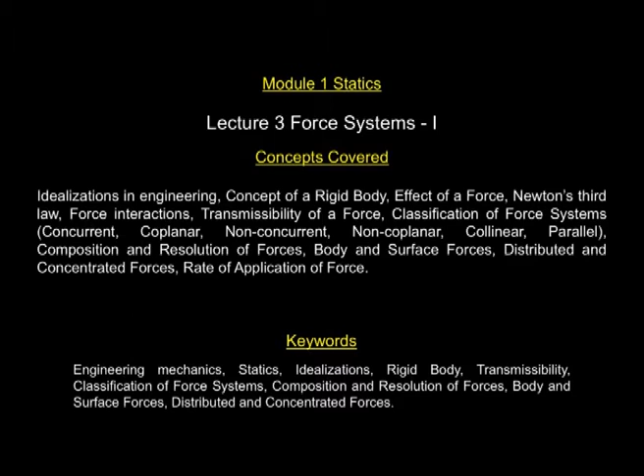So, let us get on to the main body of the course, and let me start with the first chapter on force systems.

Idealization is a crucial step in engineering approach for the purpose of analysis. Why do we do that? This is because actual behavior of systems are generally complex. Consideration of all features is difficult or impossible in many cases. So this is very important. You have to look at what is the phenomena that you want to analyze. Depending on the context, you have to make an appropriate approximation.

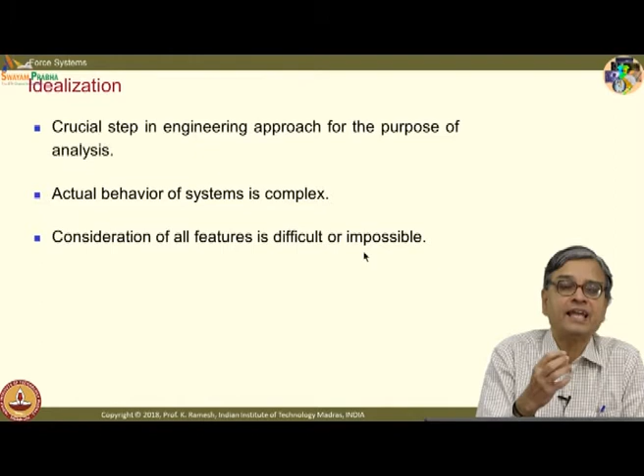So, when I have a physical system, I extract the essence of it by a mathematical model. And what is a mathematical model? We choose a mathematical model such that it is simple to analyze, yet exhibits the phenomena under consideration. So, the challenge lies in how to arrive at a mathematical model for a given physical system.

And how are you sure that whatever mathematical model I have taken is good enough for the given application? The only way is you verify it based on experimentation. So experimentation is the ultimate key to verify a given mathematical model.

So you have to look at, all physical systems are generally nonlinear. We try to model it as linear for the purpose of analysis. Otherwise, the problem becomes too complex to analyze.

See, if you can look at cosmology, they assume that mass is uniformly distributed, whereas there is a large distance between earth and the moon, and earth and the sun, where nothing is available, yet you make an idealization that mass is uniformly distributed. This may be good to start with when you want to analyze certain aspects of cosmology.

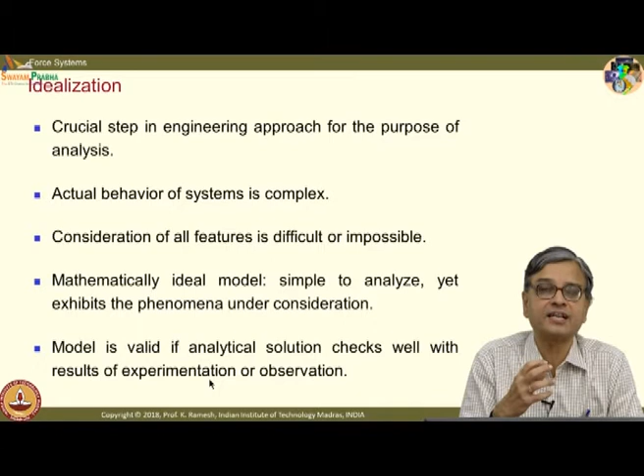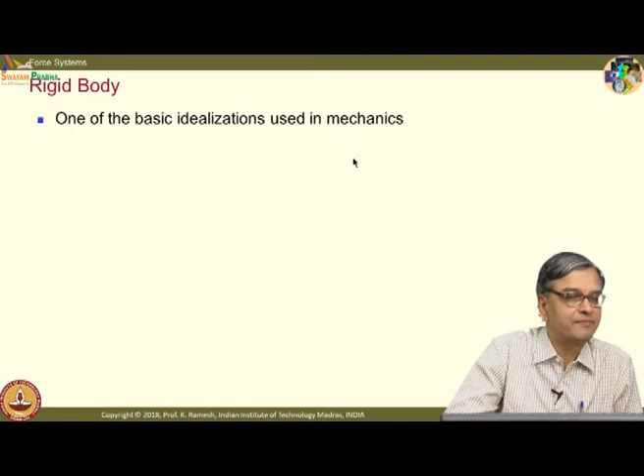And one of the basic idealizations used in mechanics is to consider the body as rigid, and we have already seen in the previous class the actual definition of a rigid body. The definition says a rigid body is one in which all particles remain at fixed distances from each other irrespective of the forces that act on the body. In essence, it does not deform under the action of forces.

Is it true? Not strictly true in many instances, but it is a very powerful idealization to get started. And fortunately, in this course, you will only come across rigid bodies. This idealization is used both in the study of statics as well as dynamics. And you cannot use this idealization indiscriminately, you have to be very careful, fine.

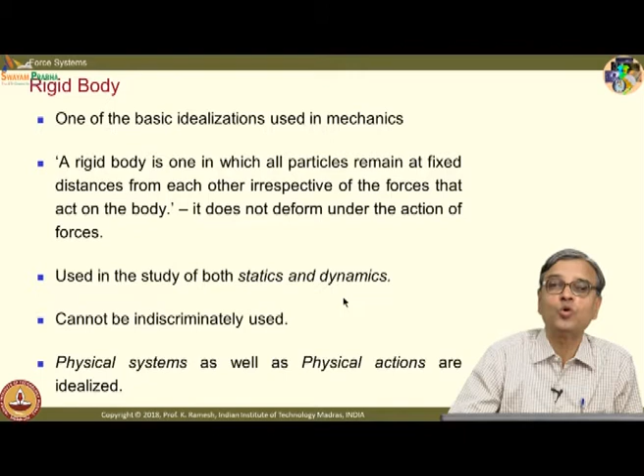And what you will have to notice is, we idealize physical systems as well as physical actions. When you say a body is rigid, you are idealizing the physical system. And we will also represent a force by a simple vector indicating it is a concentrated force. Concentrated force is again an abstraction. It goes with rigid body idealization. You can't think of a concentrated force without assuming the body as rigid, because in reality all bodies deform.

You will only have a distributed force whenever there is a force interaction. If you want to accommodate that in your analysis, you will take years to solve a problem, or for some instances you may not even have a first level solution.

And what is the concept of a force? You find a person is pulling something in the field, and another one, a footballer, is hitting the ball. So you have some kind of an interaction that takes place between the footballer's foot and the ball. Now we would like to do the analysis. How do I get started with the analysis? It is a very simple way of describing complex physical interactions between bodies. What happens physically, we model it as a force.

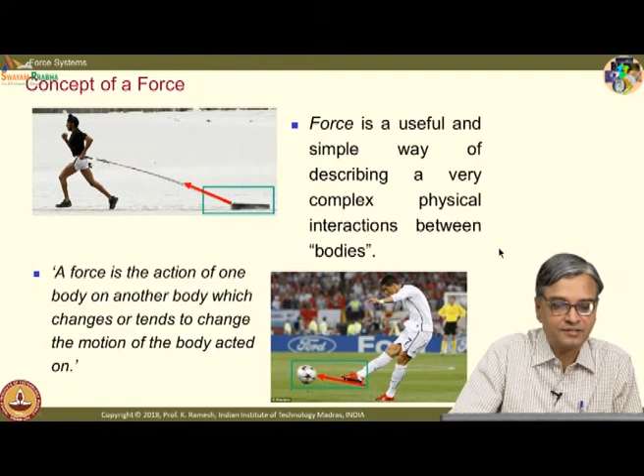And what is force characterized by? Force is characterized by point of application. I have a generic body here, and I could have multiple points where there could be force. And when I say a force, it is characterized by its magnitude as well as a direction.

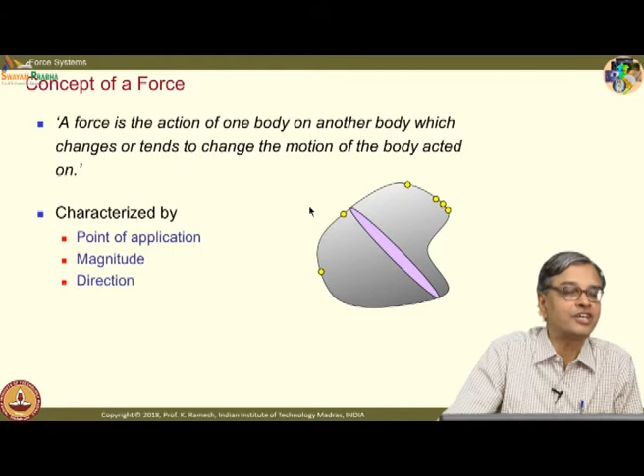So when you have a quantity which has a magnitude and direction, how will you label that? You can label that as a vector, provided it also satisfies the commutative law. If it does not satisfy the commutative law, it cannot become a vector. We will see later, finite rotation does not come under the purview of a vectorial quantity, whereas infinitesimal rotation can be shown as a vector quantity.

So I could represent the force by a line like this, showing the magnitude as well as the direction. It could be concentrated or a distributed force like this. I have already told you, in reality, whenever there is interaction of one body with the other, it will always be distributed. But in many instances, to make our life simple, we indicate this by the resultant and show that as a concentrated force. Concentrated force is also an abstraction, goes hand in hand with rigid body idealization.

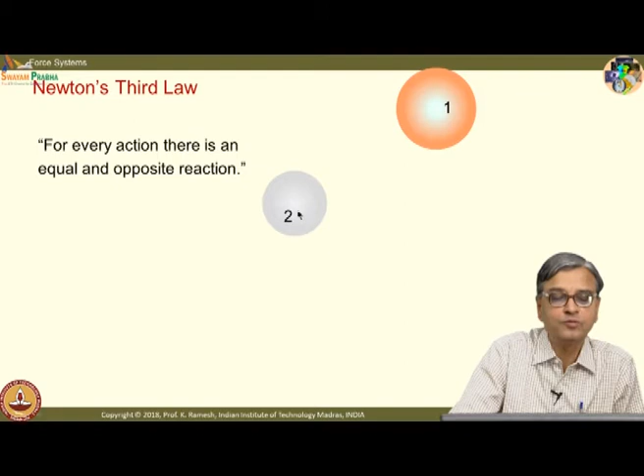From Newton's third law of motion, force always exists in pairs. I cannot have just one force indicated like this, for which I have to look at Newton's third law: for every action, there is an equal and opposite reaction. I have shown two bodies, 1 and 2. So body 1 will exert a force on 2, body 2 will exert a force on 1, and I could show them as vectors like this, F12 and F21. So when I say force, it indicates this pair, and they are equal and opposite, very obvious. Okay.

And you should also remember and understand it very clearly: action and reaction forces always act on different objects. They do not act on the same object.

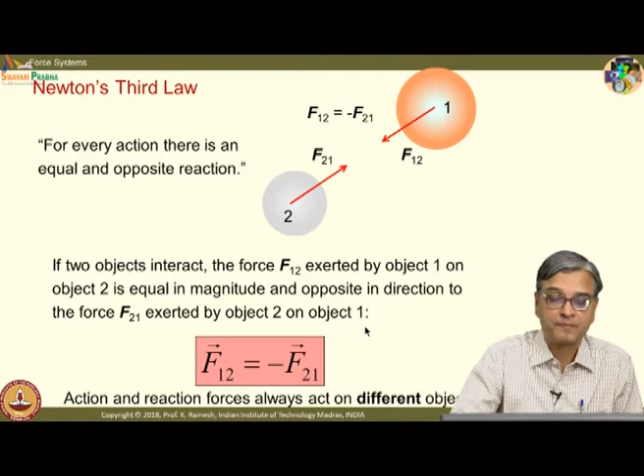And what kind of force interactions can you come across? Interactions can be between systems in direct contact or those which are physically separated. So I have a rail wheel on rails, and there is direct physical contact between the wheel and the rail. And how do I represent this interaction? I separate these two bodies, and I have a force F1 acting on the wheel and F2 acting on the rails.

This is by direct contact. I would like you to make a sketch and then put it in. These concepts will look very simple and too obvious, but your notes should be complete, because we have to build a strong foundation.

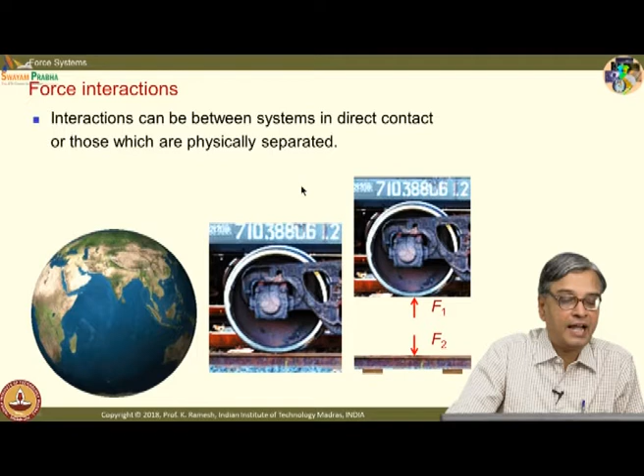I can also think of an airplane flying. It does have an interaction with the earth. There is no direct physical contact, and that is why gravitation was so difficult to comprehend. So whenever you are going to draw a free body diagram, you will have to look at forces that happen in direct contact and force interactions that act without direct contact. We would see them as surface forces and body forces.

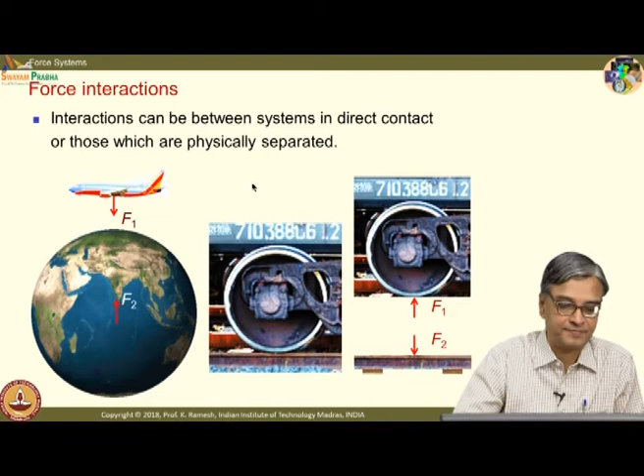It has become customary to apply the term force indiscriminately to either the pair F1, F2, or to the single vectors F1 or F2 separately. So both usages are seen, and we simply represent F1 as a force and be done with it.

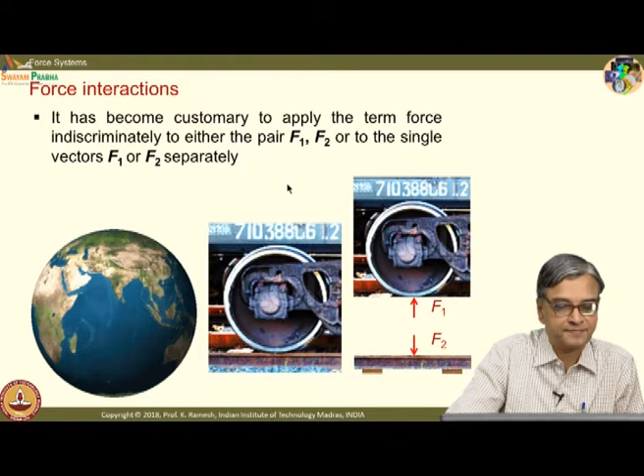And what is the effect of these forces? See, I have an ordinary screen and I draw a line as a vector. I have not shown what would happen to the body. Suppose I use the facilities of animation and try to show you, if I put a force on a body, what would happen to it. We would see that in the next slide.

Okay, I have a force F1 acting on this. What would happen to this? It would translate. You are not having a smart screen which understands mechanics, and when you make a drawing, you put a force and it shows what is the motion. Some of you should develop that for Google, because they are making all new developments with artificial intelligence. You can also make a smart screen which understands mechanics.

Here I have cleverly taken an example where this force F1 passes through the center of gravity of the object. So when I apply the force, it has only linear translation, and you could feel this force if somebody pushes you, depending on where he puts his hand on your chest. If it is at the center, you will translate. If it is on one of the edges, you would translate as well as tend to rotate, but you might resist and then stand, that is a different issue. But if you allow yourself to be acted by the force, you should feel that any force that acts on a body in general produces a translation and a rotation.

In exceptional cases, you may have only rotation or only translation, but the generic effect is a combination of translation and rotation. And in the case of an aircraft, what happens? Unless the earth exerts a force, the aircraft would fly off from the earth. So it follows a particular trajectory.

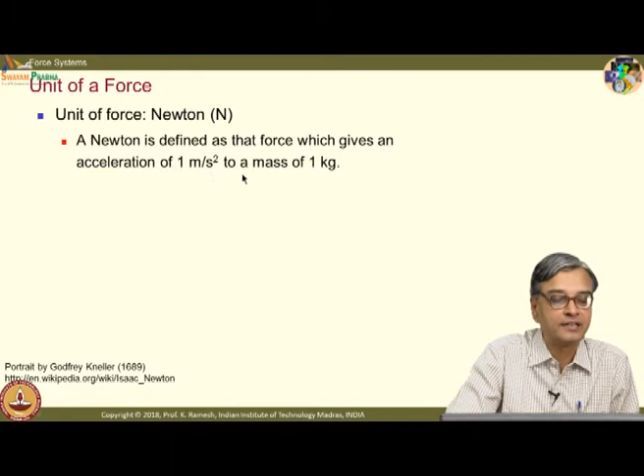Let us also understand what is the unit of force. The unit of force is given a name in honor of Newton, you call it a Newton. A Newton is defined as the force which gives an acceleration of 1 meter per second squared to a mass of 1 kilogram. And it is a very nice portrait of Newton drawn in 1689.

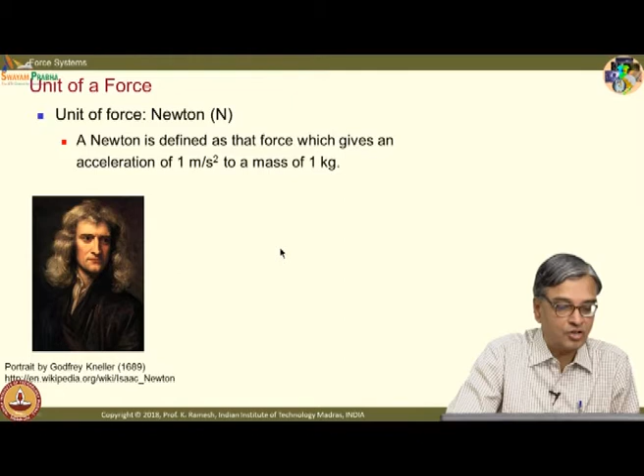We have already learned something about Newton, we have some more data. He is an English physicist, mathematician, astronomer, philosopher and theologian. I also find these dates are different. If you go to history, scientific historians find some dispute on some of these dates. The earlier slide had this as 1642, it shows as 1643. And undoubtedly, he was one of the most influential scientists and people in human history. His work laid the foundation of most of classical mechanics, and he also built the first practical telescope.

Observations are very, very important. That is what I said. You have a mathematical model. How do you verify the mathematical model? Only based on experimentation. And in those days, their first choice was to look at stars and predict their orbits, and then verify their understanding of mechanics.

He is also credited with developing differential and integral calculus along with Leibniz.

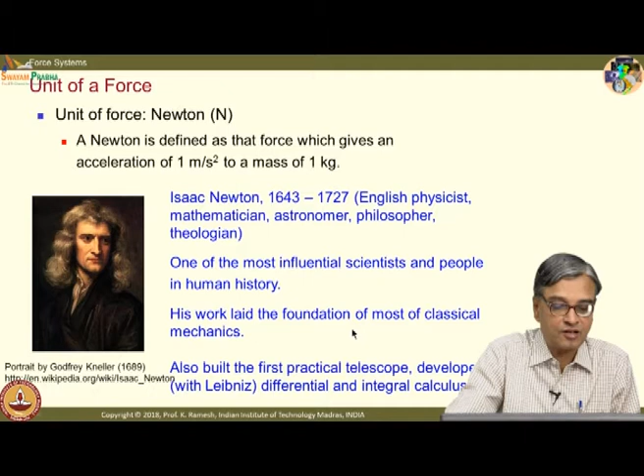Another subtle concept of force is transmissibility of force, which we will be repeatedly using in this course. There is a justification. The principle of transmissibility states that the external effects of the force are independent of the point of application of the force along its line of action. What you have to pay attention to is external effects, we are not talking about internal effects. Internal effects would be different, but external effects remain unaltered if I move the force along the line of action.

I have a nice animation to show this. I have a force acting on this. Now let me have a body with this force. Now I make the body smart, so it understands mechanics. Because of the force, the body will not remain at rest, it will move, and I have taken a snapshot up to this point.

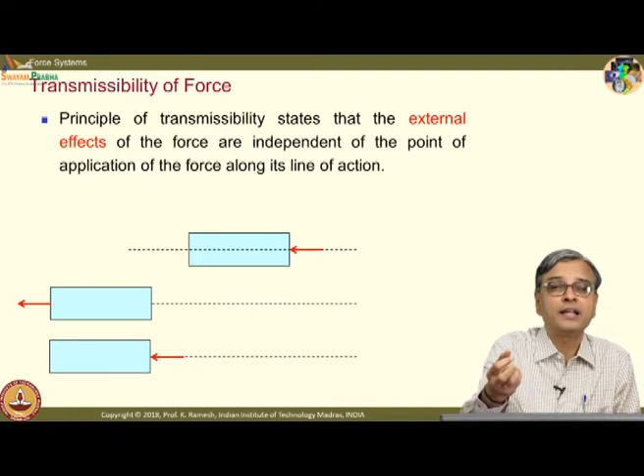Now what I do is move this force to the rear of the body, which I can do easily, and look at what will happen to this body. When I apply the force, what will happen? This body also will move forward. So what do you find here? I can move the body by pulling, or I can also move the body by pushing, it does not make a difference. It is a very, very useful principle that we will repeatedly use when we have a force system to be simplified.

And we have already idealized the body to be rigid. This concept also goes with rigid body idealization.

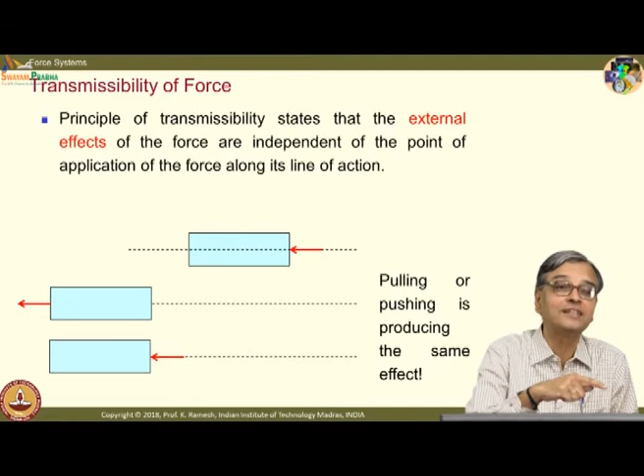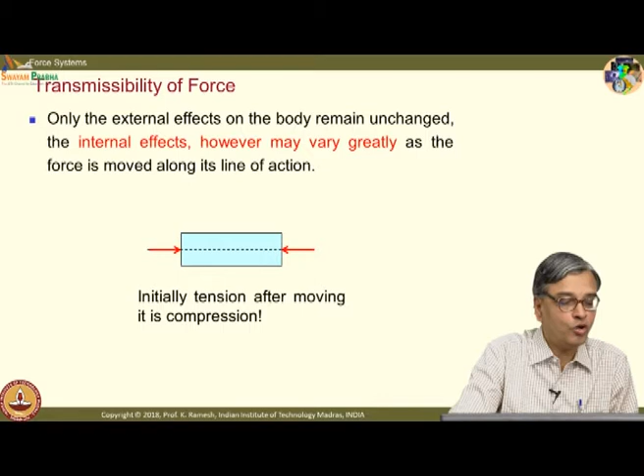Now let us look at what kind of internal effect is possible. Now I do not have one force, but another force to balance it, and this is like pulling the body, so the body is under tension. If I move them along the line of action, what happens? The body is under compression. And in both instances, what happens? The object is at rest, that is the external effect.

We have taken the body to be rigid, so the distance between the particles does not vary. In one case I apply tension, in another case I apply compression. The external effect is the same.

Suppose I make the body deformable and visualize what could happen. A rigid body will remain like this. If the body is deformable, you will find when I apply tension, it will elongate like this. When I apply compression, it would get compressed from its original dimensions. Even though the internal effect is different, the shape of a rigid body will not change by definition.

Look at the word definition. In physical reality, it does happen, it does change shape, maybe minutely. If you make a very high magnification, you will see it. If my interest is to find out the external forces, this approximation is a convenient way to carry on with the analysis.

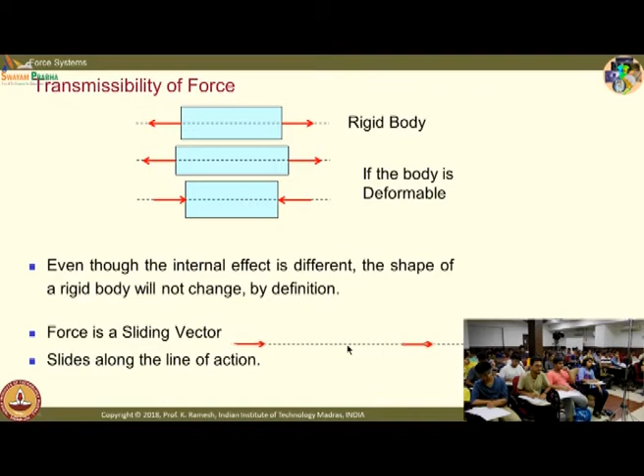Force is a vector, but we also qualify that force is a sliding vector, and this has to be used judiciously when you are looking at the external effects of the force. So, what you learn is force is a sliding vector.

What are the classification of force systems? If you understand different force systems, then you can easily find out the resultant based on its properties. One of the simplest force systems you can think of is a concurrent force system, where action lines of all these forces meet at a point.

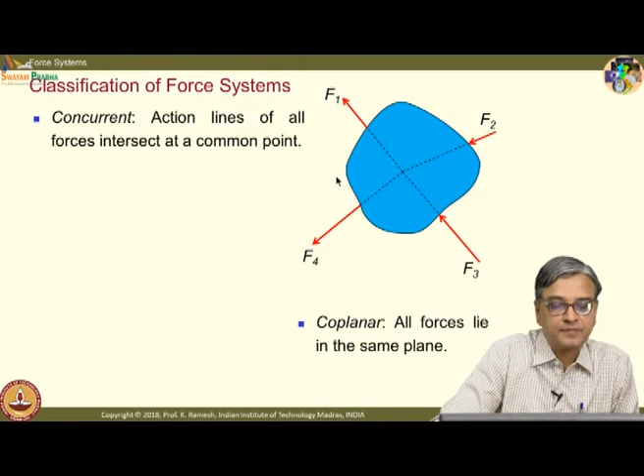It should not be offset. If it is offset, it is going to disturb the idealization that you would model it for a truss. I would in addition also have a moment, which we do not want to have.

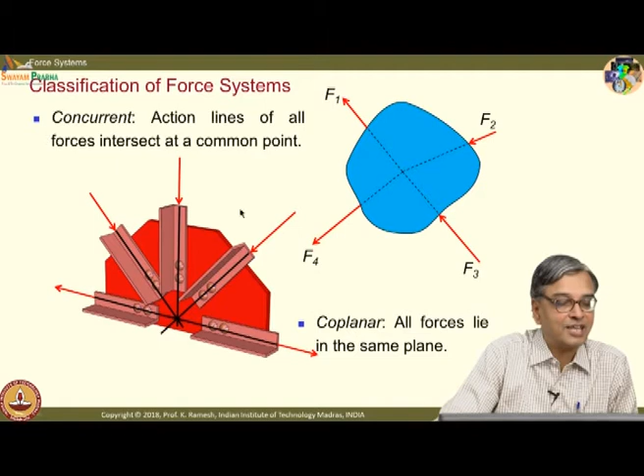Make a neat sketch of this. You are in the first semester, and if you are exposed to engineering drawing, one of the first trainings you are given is how to sketch. You may not become an artist, but you should know how to sketch physical systems from an engineering perspective. This is an isometric view of the system for you to get the details. Try your hand on it to the extent possible.

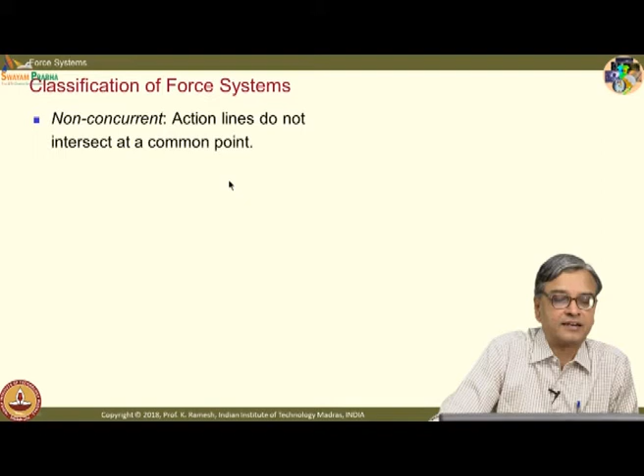If you look at any transmitting tower, for example a radio transmitting tower, you will find it is a thin column and they anchor it in its place by steel wires. They are called guy wires, to take care of the wind loads, and the tension would be adjusted by a turnbuckle at one of the ends.

Soon we will learn how to idealize supports. Focus now here is, we have idealized the body as rigid, then we are trying to understand different force systems. In the process, I show you certain idealizations indirectly, but we will also have a formal discussion on how do I idealize a wire connected to a structure, or how do I analyze a fixed end, that we would see sooner.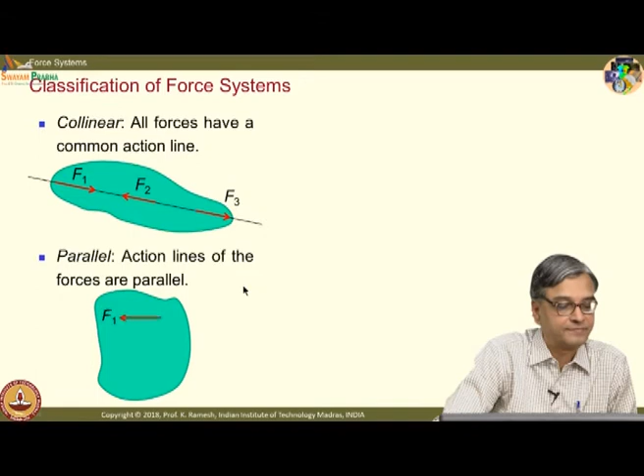I could also have another force system where action lines of the forces are parallel. You may ask where this kind of a force system can come into play. I have a simple example, and the simple example is like this.

I have a member with rollers on two ends on a floor. I have a pin joint here and I have a wire connected to this, a sort of a rope, and I go and pull the rope. That is what I am going to do.

When I pull the rope, I would draw the free body diagram of this member. This roller is lifted from the floor, this roller interacts with the floor, that interaction is replaced by a concentrated force, and the interaction of the rope is put as a force like this, and weight of the object is acting downwards like this. This forms a parallel force system.

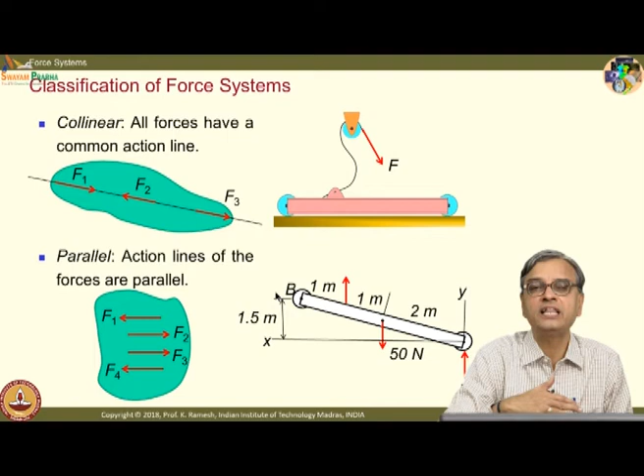So, you could have in applications systems having parallel forces, collinear forces, concurrent forces and non-concurrent forces. They can be coplanar or non-coplanar. All these combinations are possible.

Once we have looked at the force system, we would like to simplify them. The process of reducing a force system to an equivalent and simplest force system which has the same external effect - that is what you have to underline. We are only looking at external effects on the body, as the original force system is called composition.

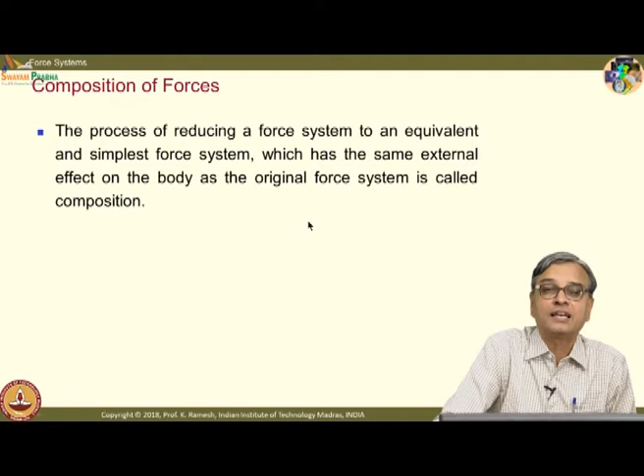For us to do this, we would use the property of the force - we have seen transmissibility of a force. Once I move the force to a convenient point, I could find the resultant by using parallelogram law of vector addition. Vector addition, it is put as edition here, please correct it.

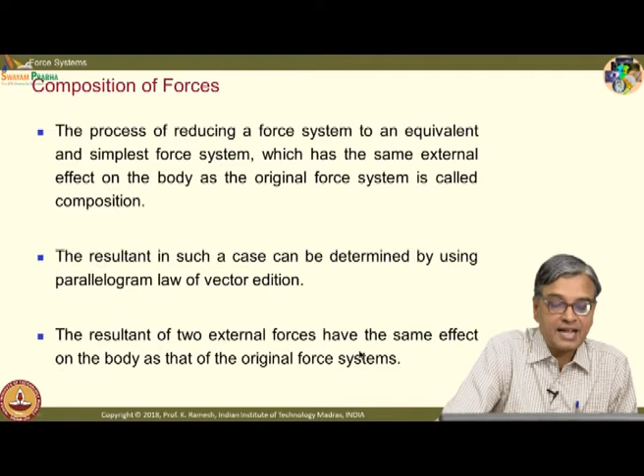The resultant of two external forces have the same effect on the body as the original force system. That is a key point. When I have multiple force interactions, reduce local interactions by a simpler force system is desirable to analyze the body. For me to reduce that, I use the concept of composition of forces, which you all know indirectly from your earlier learning. We are only revisiting the same old concept so that you do not make a mistake in future.

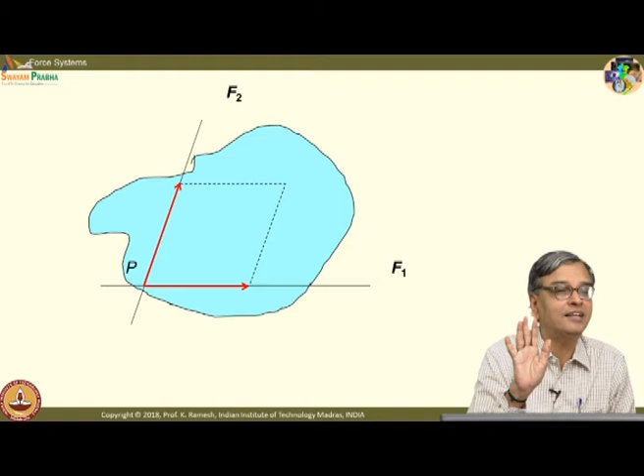Very simple, which you have done many number of times in your earlier learning, but it is better to recollect that, and associate that you have been able to do this because you are looking at the external effects - number one, and you are employing the property of transmissibility of force. You may not have paid attention to transmissibility of force in your earlier learning. By rote practice, you would simply move and then take a resultant. Now, you have a principle behind that.

I have a resultant. This has the same effect as the individual forces. Both these systems have the same external effect on the body.

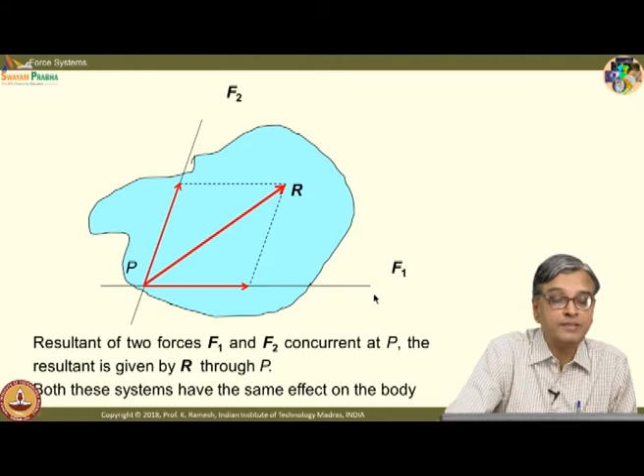Once you have looked at composition, you should also look at resolution of forces, because we need both tricks. Depending on what is the problem on hand, I would do resolution or I will do composition. Resolution is reverse of composition, so I get the force into their components. The process of finding two components of a force which will have the same external effect on a body as the force itself is known as resolution of a force.

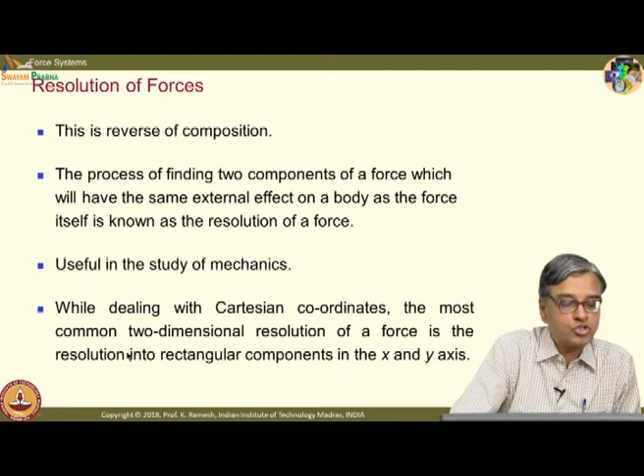Here I have put two components because it is easy to look at two-dimensional analysis first. If I do a three-dimensional analysis, then I should get three components. It is useful in the study of mechanics. While dealing with Cartesian coordinates, the most common two-dimensional resolution of a force is the resolution into rectangular components in x and y axis. You have different coordinate systems - I have polar coordinate system, I have NT coordinate system. So, depending on which coordinate system you are looking at, we would like to see the components, and that is known as resolution of forces.

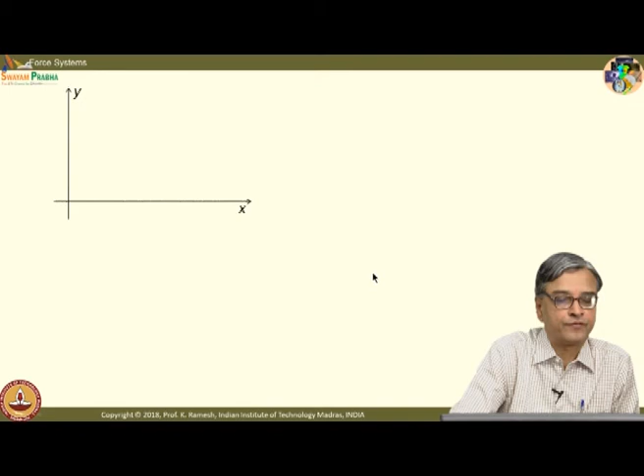I have taken a Cartesian coordinate system, I have a force F. All this is very well known to you, but for the purpose of completeness, let me list out the steps. It is oriented at angle theta - more of recollection of your early learning. I could write the force in terms of the x component and y component. I have Fx i and Fy j, where i and j are the unit vectors in these directions.

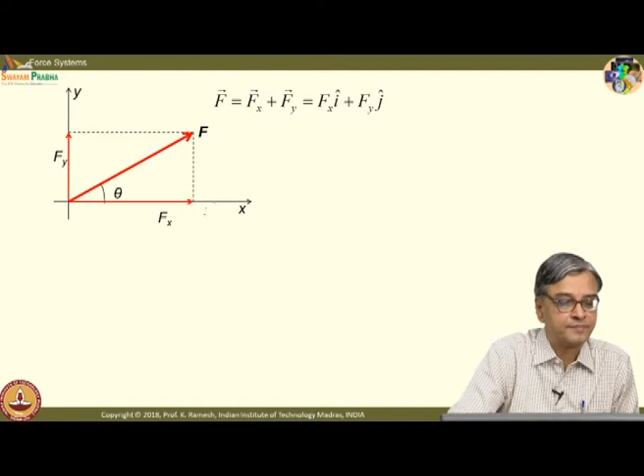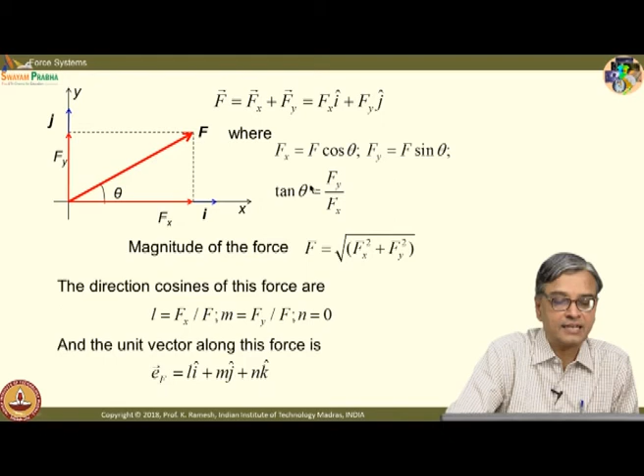So, I have this force with magnitude Fx and Fy. Then I can write many of this. What is Fx? Fx is nothing but F cos theta, and what is tan theta? It is Fy by Fx. And what is the magnitude of the force? What are the direction cosines of this force? I can put them as L, M and N. And what is the unit vector representing the force? I could put that as Ef equals Li plus Mj plus Nk. All this is taught to you earlier. Okay, we are just having a recapitulation.

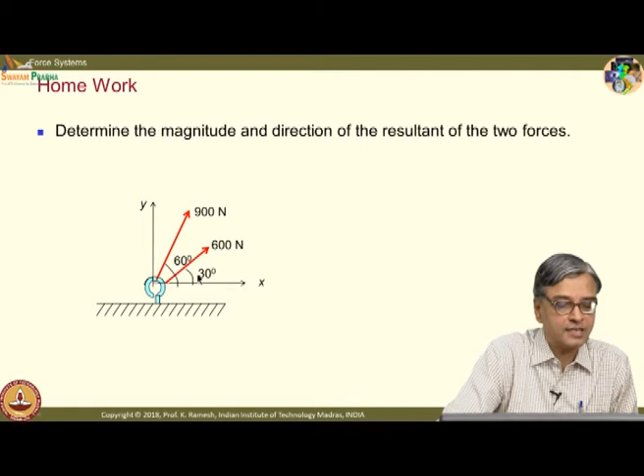You can also do a simple homework if you want. I have a hook with two forces at 30 and 60 degrees. Find out the resultant. I am not going to solve it, just for you to have some practice.

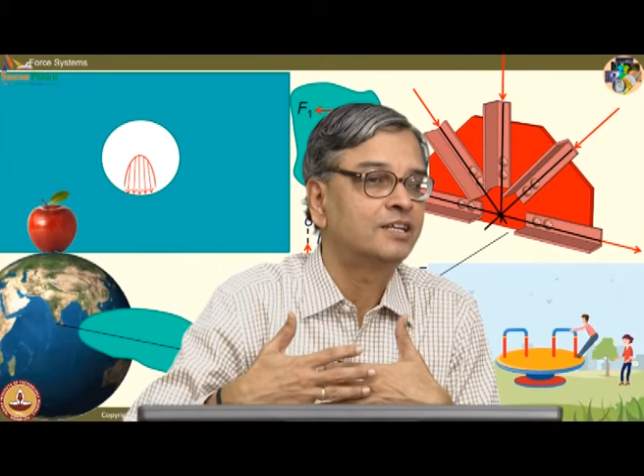I had told you earlier, you have forces that happen when two bodies interact directly, and there are also forces that act at a distance. We could classify them as body and surface forces. And what are body forces and what are surface forces?

By definition, body forces act on each volume element of the body. One of the commonest examples of body force is the force due to gravitation, which you call weight. This interaction could also come from other sources, like magnetic field, electric field, or even centrifugal field. One of the very important aspects when we draw the free body diagram later, you must consciously account for the body force interaction. There could be mistakes if you do not accommodate this, because there is no direct physical contact.

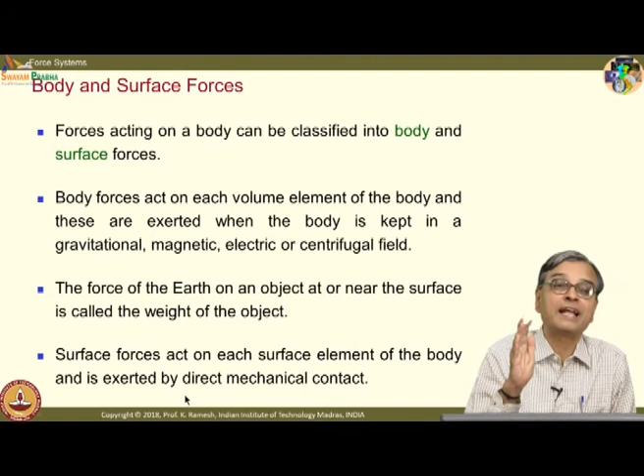The force of earth on an object at or near the surface is called the weight of the object. On the other hand, surface forces act on each surface element of the body and are exerted by direct mechanical contact. So when you draw the free body diagram, by definition you cut from the surroundings and replace the interaction with the surroundings by forces. You will normally not miss the surface forces, but body forces you may miss.

But cleverly, in many engineering applications involving mechanical and aerospace, the effect of weight is usually neglected to make our life simple. On the other hand, if I have to analyze a civil structure, for example a beam, it is so heavy that I cannot neglect the weight of the beam. So we do idealizations very cleverly to make our life simple, and mind you, the solution you get is not exact, it is always approximate, good enough for a given application. That is the way you have to look at it.

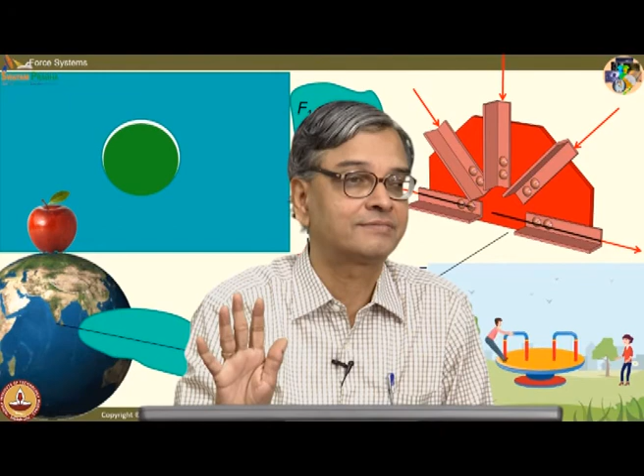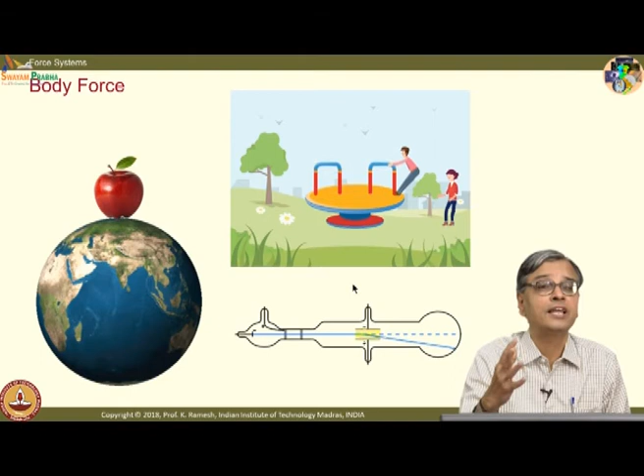One of the body forces you can think of is the attraction of gravity, you see the apple falling. You also have electrical charge - the electron beam gets deflected depending on the charge, that is again a body force. And we have already seen a rotating platform - when you sit and enjoy the merry-go-round, you feel the centrifugal effect, and they are all body forces. Particularly when analyzing a turbine blade rotating at very high speed, you have to account for centrifugal effects in your analysis. If you do not do that, your results will be far away from experimentation.

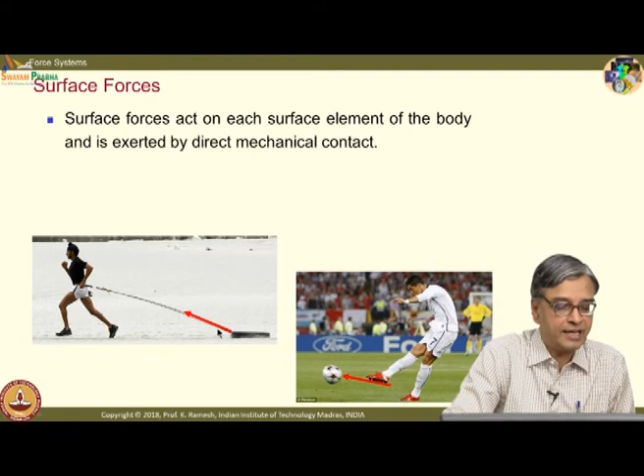When we go to surface forces, the direct mechanical contact is very clear. We will also look at distributed force - I said all bodies are deformable. In general, any force interaction is only a distribution. But there are also instances where we had seen parallel force system, so we have to find out the composition of it.

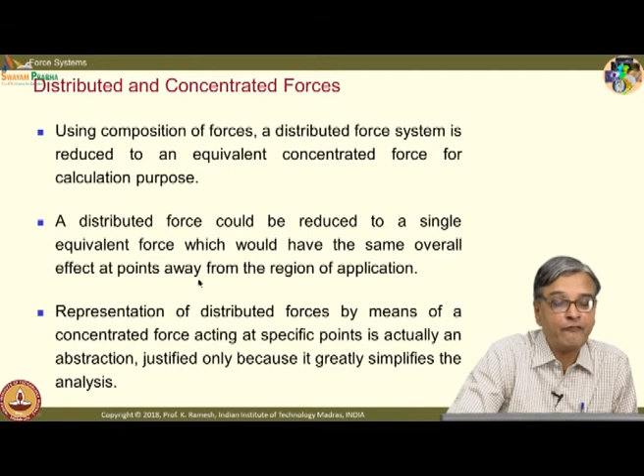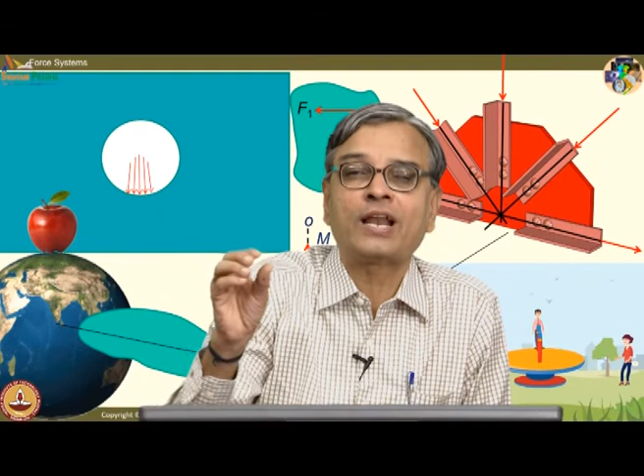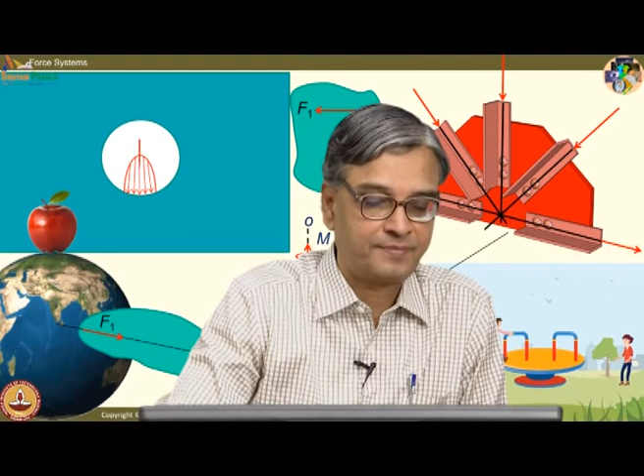That is what we will look at now. A distributed force could be reduced to a single equivalent force which would have the same overall effect at points away from the region of application. This is important, which engineers use. When the body deforms, at the actual interaction, what happens physically and what happens in our mathematical model can be different. Leaving those points of application, if I have the force system statically equivalent, it will have the same external effect. That is very, very important. Representation of distributed forces by means of a concentrated force acting at specific points is actually an abstraction, justified only because it greatly simplifies the analysis.

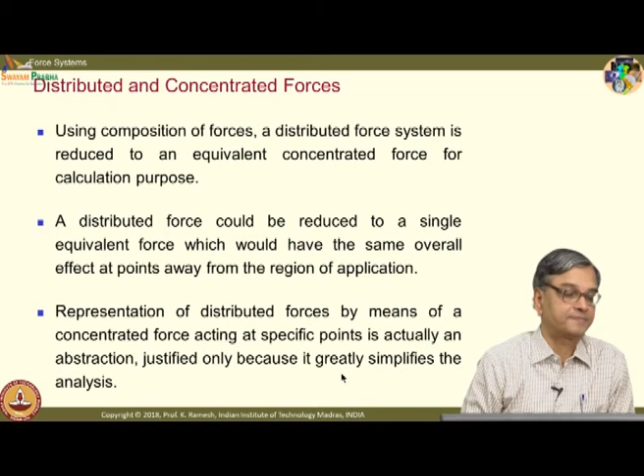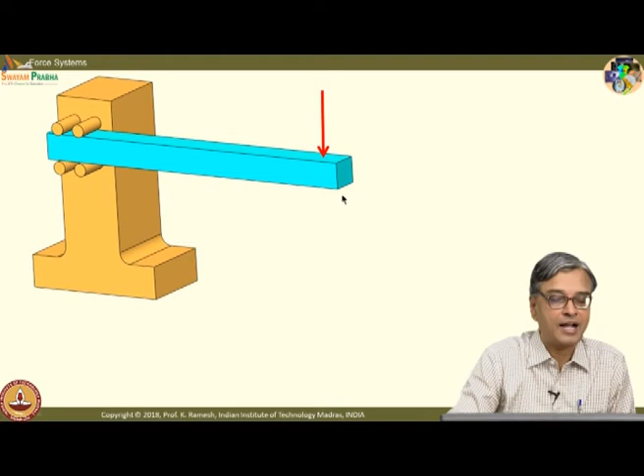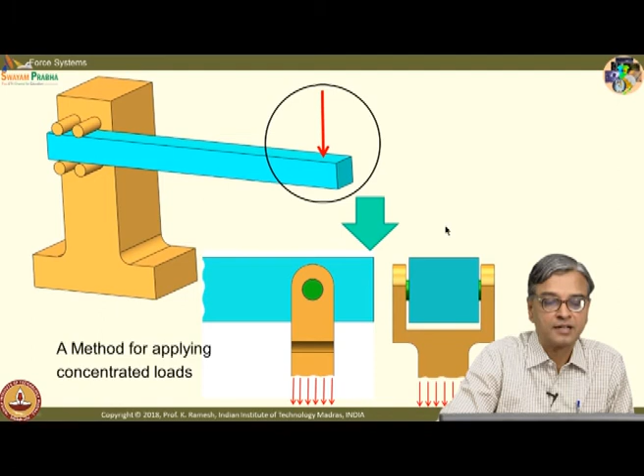One of the ways of applying this force could be: I could have a pin inserted into a hole at this point. Looking at the front view and the side view, I have a pin running through the hole, I have a fork. On the fork I could have a weighing pan and put some weight there. If I analyze only the fork, I could replace this as a uniformly distributed force, and I would have interaction of a pin with the hole on this member. Let me show this - I would pass an imaginary plane that cuts across this member. What way would I see the interaction between the pin and the hole?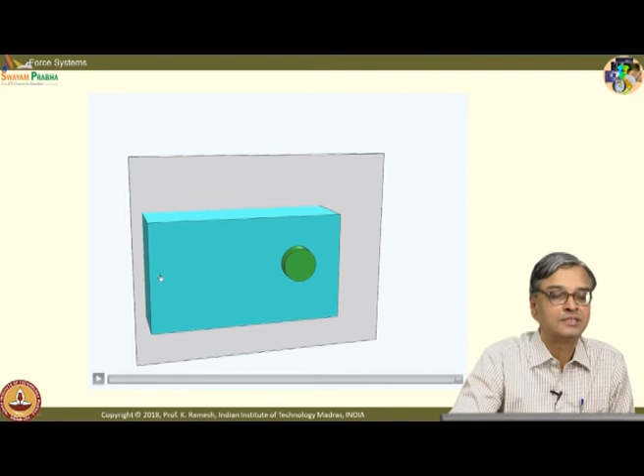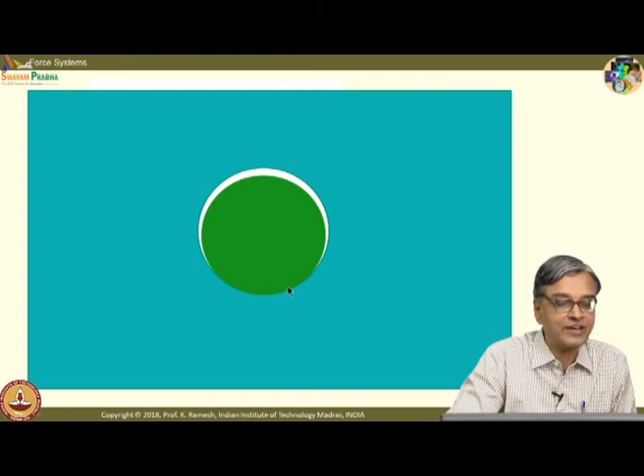I would have a clearance which is not visible in a small diagram, so I will magnify it. I have a clearance and the pin would be resting on the hole like this. And if you really look at the kind of interaction here, the force would be distributed.

If you go for higher studies, you will learn what is known as contact stress, that also specifies what kind of distribution is there. This distribution is ellipsoidal and you idealize this as a Hertzian contact. I would in fact have a distribution like this.

Imagine if I have a body which has interaction with its surrounding, each one of these interactions is so complex. If I want to retain all of them and try to do the analysis, it will be too difficult to handle. I would in fact replace this by a simpler force system, a concentrated force. I can find out the resultant and simply replace it as a concentrated force.

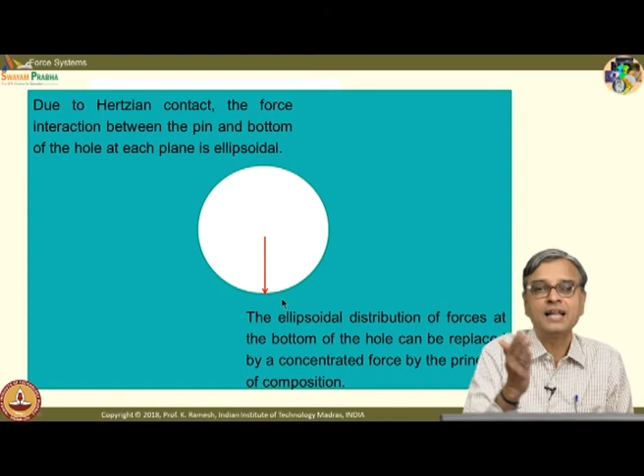We have already seen, I have put an imaginary plane passing through the member, and looked at what happens at that plane. Physically, the pin is occupying a finite distance, so the same thing would get replicated at each one of the planes. Let us see how it happens.

I have shown it like this. When I replicate that, I would have a parallel force system that would be existing between the pin and the hole. By composition, I can replace the parallel force by its resultant, and by the concept of transmissibility of force, I can move this force to this end.

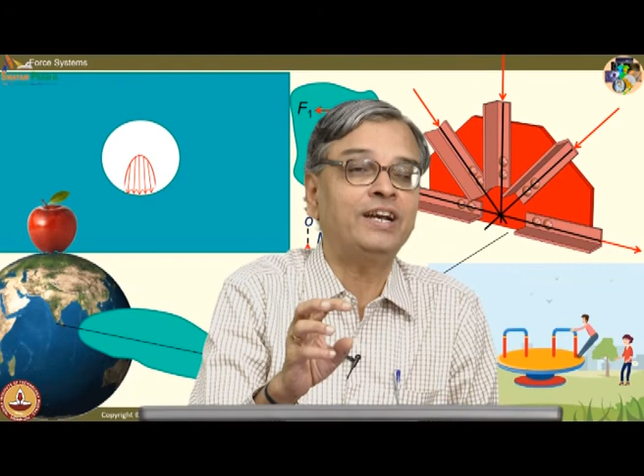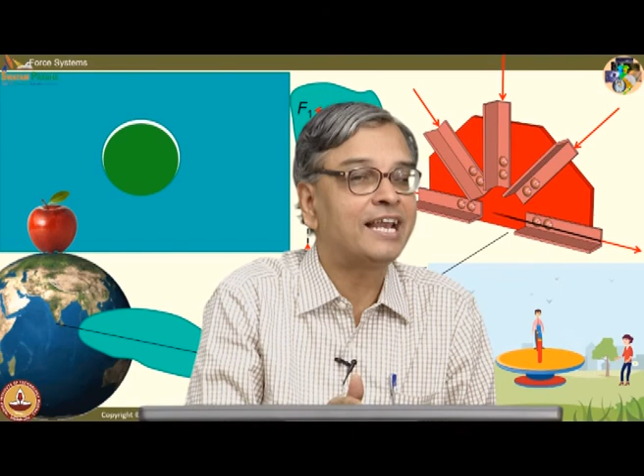So what you have seen is, in a simple picture you put a concentrated load, but it is not actually that simple. If you really look at a physical equivalence of it, many interactions are simplified and you have used the concept of transmissibility of force, composition of force, and then replaced it by a single concentrated force to represent this complex interaction.

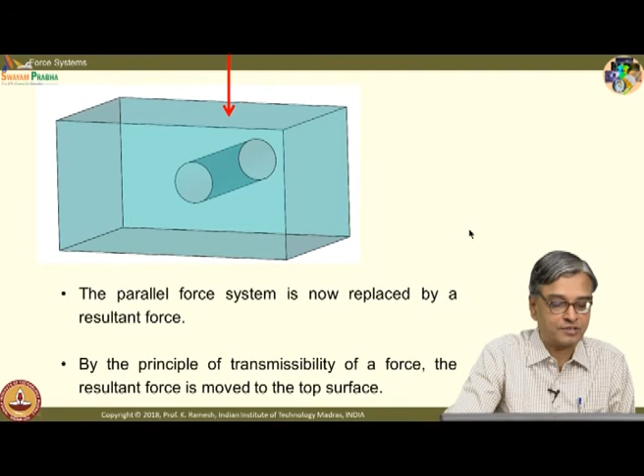We have now looked at surface force, we would also look at body force. By definition, gravity acts on every volume element of the body, and that is where you find the mass center and then replace it by the weight.

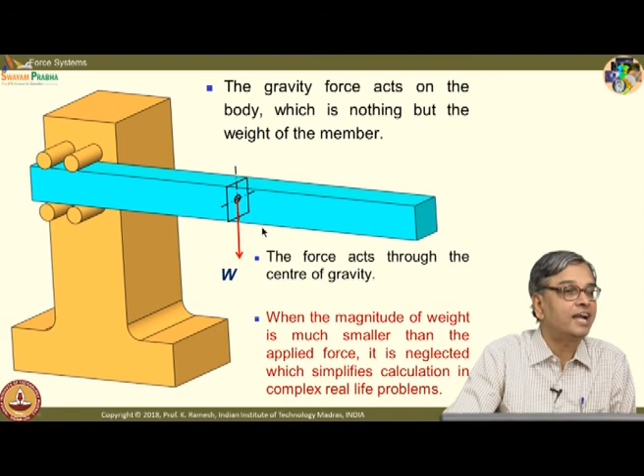You have to see it with caution. When the magnitude of weight is much smaller than the applied force, it is neglected, which simplifies calculation in complex real life problems, which we usually do in many mechanical and aerospace systems, not in civil engineering.

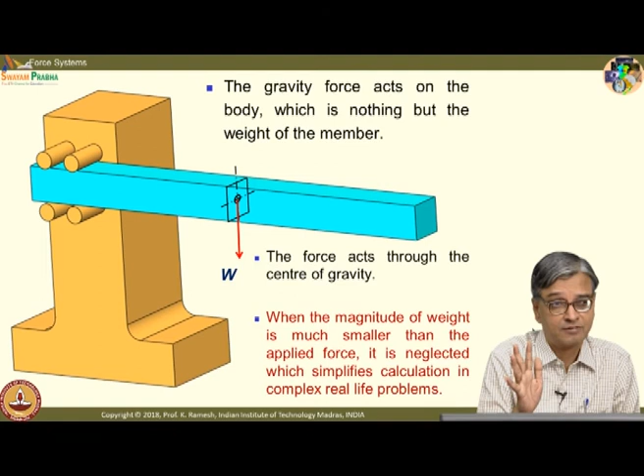We will also see one more concept. We have been looking at an apple falling, and we also show forces which have a magnitude given by the length of the vector. How these forces are applied is a very, very important aspect.

If the apple is falling like this, we are not going to analyze it in our course, because what happens is: at time t0, there was no force, and at time t just after that, you have a full magnitude of force. We are not going to analyze such problems.

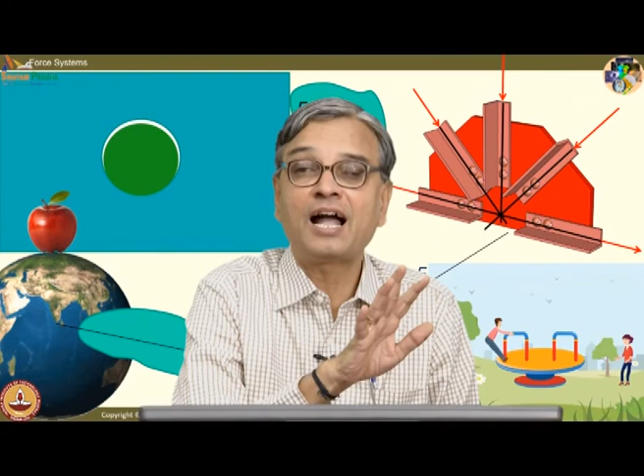Whenever we say that there is a force, we always perceive that it has been applied gradually. So in this course, unless otherwise stated, forces are assumed to be applied gradually for mathematical analysis. If I have a force which has an impact, the approach has to be different. For convenience, we show that as a vector, we keep our eyes closed to how these forces are actually applied.

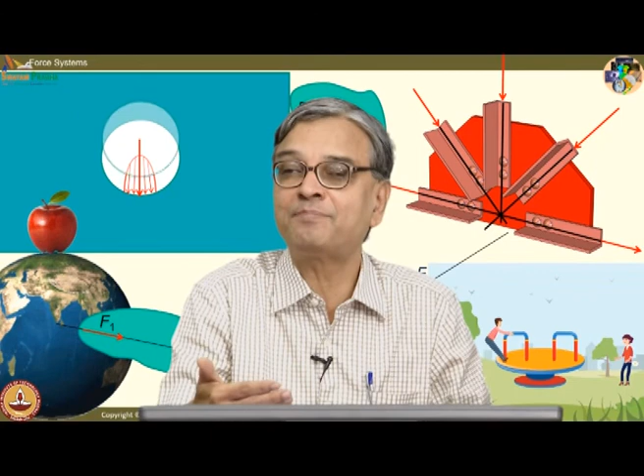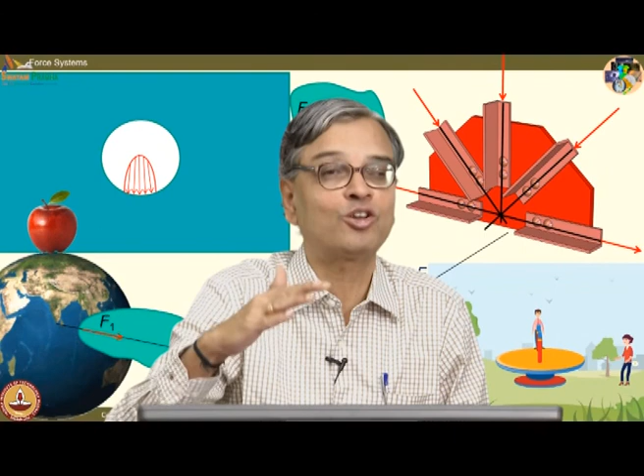I had shown a nice example: when there is a concentrated force on a cantilever, it is not that simple. Physical appreciation of this requires multiple elements, multiple force interactions, and bodies are also deformable. We make it rigid for analysis purposes, reduce the force into a concentrated force, and do the analysis of the problem.

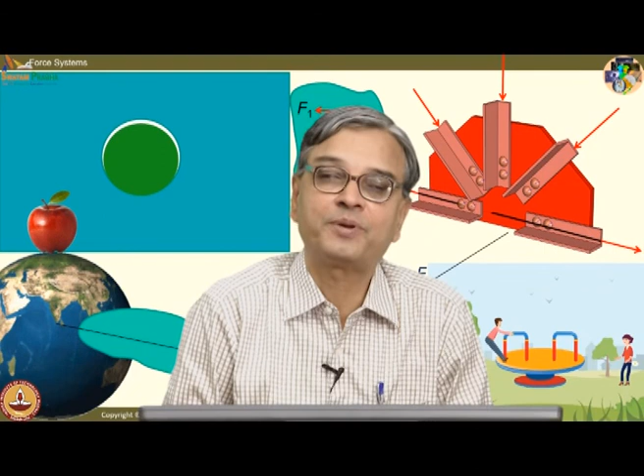So in this class, we have looked at in broad perspective what is the concept of a force, and we have learnt transmissibility of force. We have also looked at force as a sliding vector, and said that we would idealize the physical body as rigid for the purpose of analysis. I also pointed out a good engineer makes very intelligent approximations.

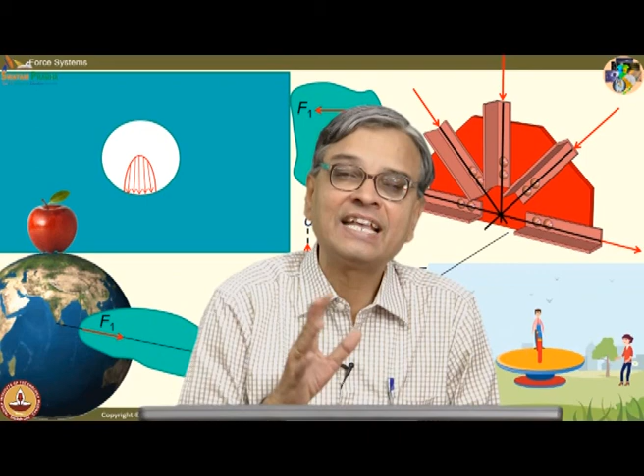Without approximations, there is no engineering. You are a good engineer if you are able to solve a practical problem with the essential features necessary for the given application. Thank you.